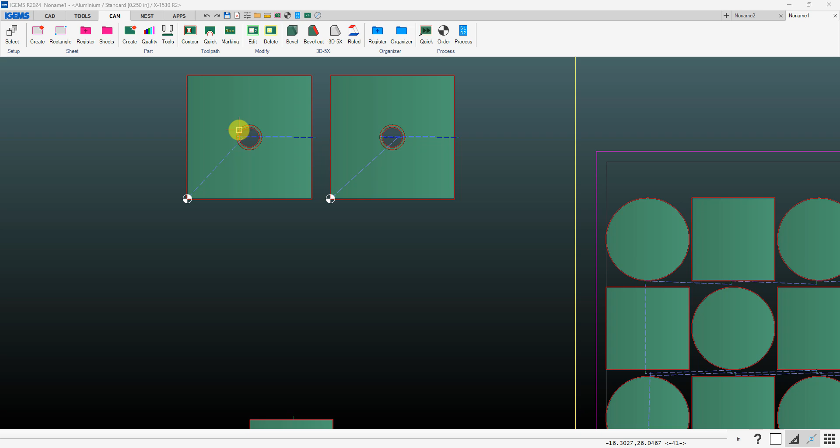When you post out a file for Apex 60 using the height setter, you might get a warning about potential height setter collisions. And what we're looking for is areas where the height setter might come down within a specified radius around a prior pierce point.

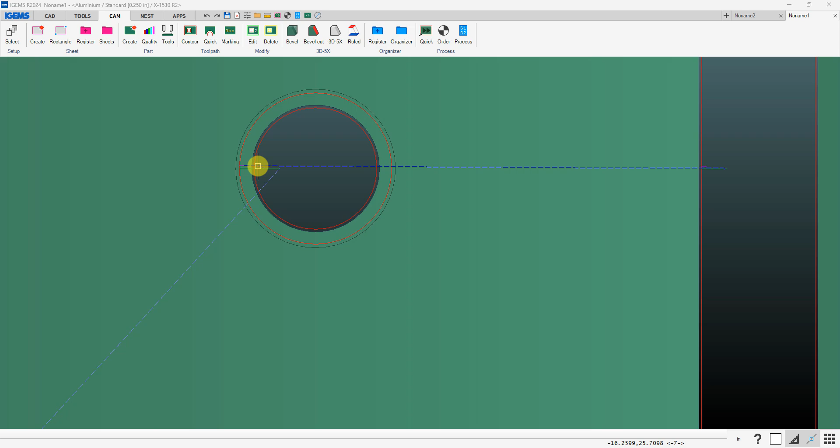If we're doing a countersink like this, normally we're going to height set and do the vertical cut first, and then come back just using programmable Z for the bevel cut. However, if you change things around, or like I've done, apply a height set attribute on the bevel cut to force it to do a height set, then you can get it into a situation where the height setter would want to come down on an area where there's not going to be any material, because the slug will probably have dropped into the tank.

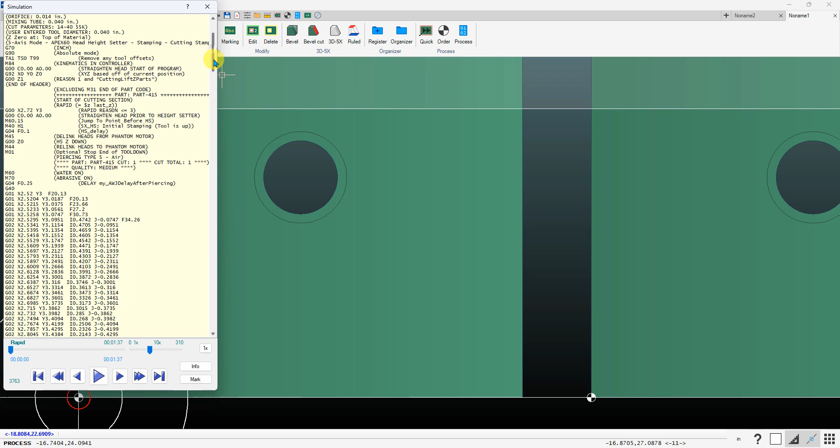So we want to, of course, avoid that, and that's what this warning message is that you can potentially get. So here it warns us potential height setter crash, and of course it's going to cut that vertical cut first, and then because I applied a height set attribute on the second cut, it comes back, wants to do a height set there, and because that height set is within a ½ inch radius of a prior pierce point, then it gives us that warning about the potential height setter crash.

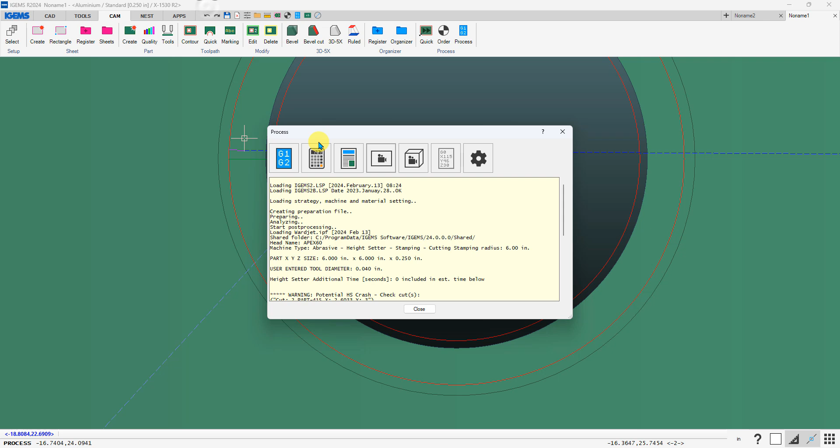So normally good practice, if you are doing something like this, to do your lead-ins for the vertical cuts very close to where you'll be doing the lead-in for the countersink, and then normally it'll do the height set on the first vertical cut, and then use programmable Z for the bevel cut.

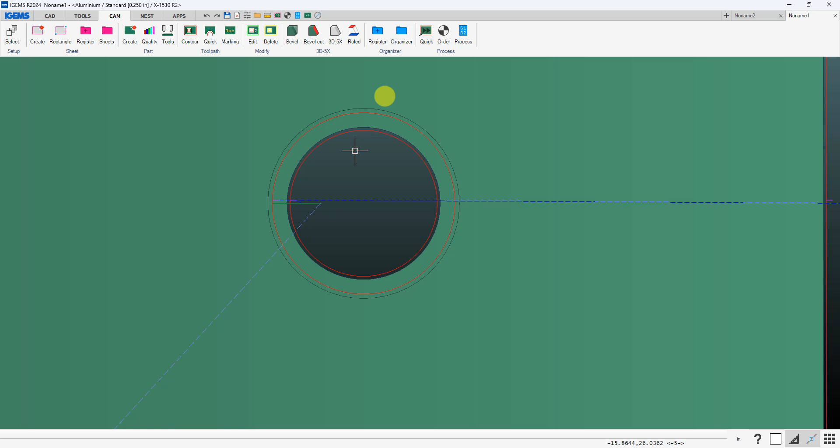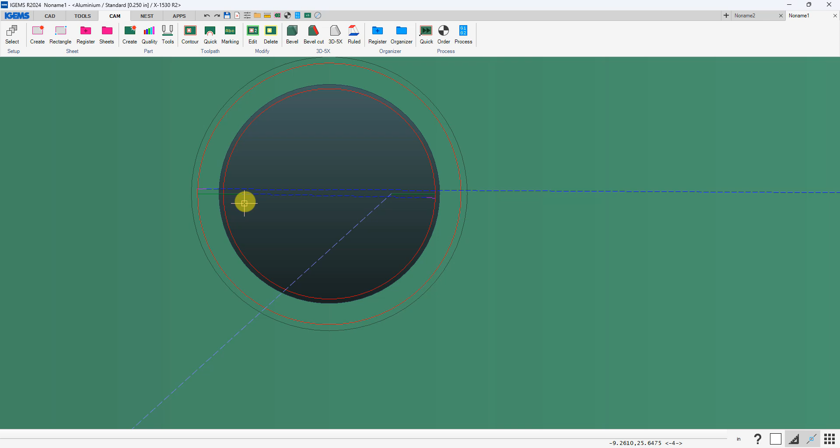If you do a technique like this, which wouldn't be recommended, you've got your lead-in for the vertical cut over here, and then you've got a fairly long distance over to where it's going to do the bevel cut, so there's the potential that the height setter might want to then be triggered, and then you're not going to have any material there, so beware of that. This is an area where this could fail. So here we get no warning about any issues because the height setter is beyond that ½ inch radius from that prior pierce point.

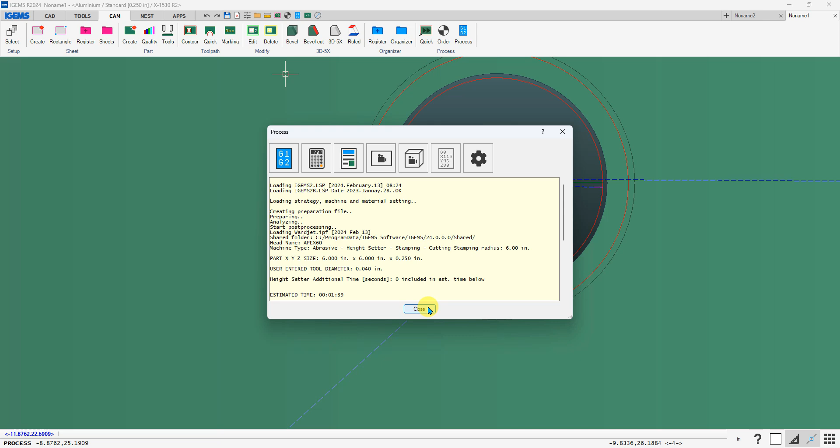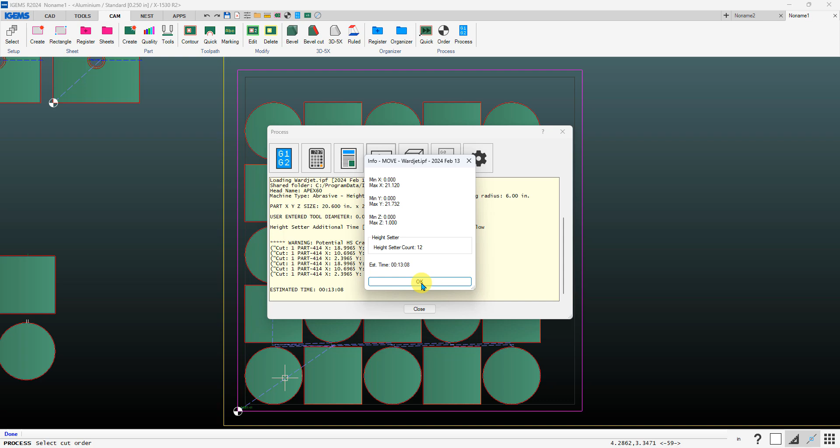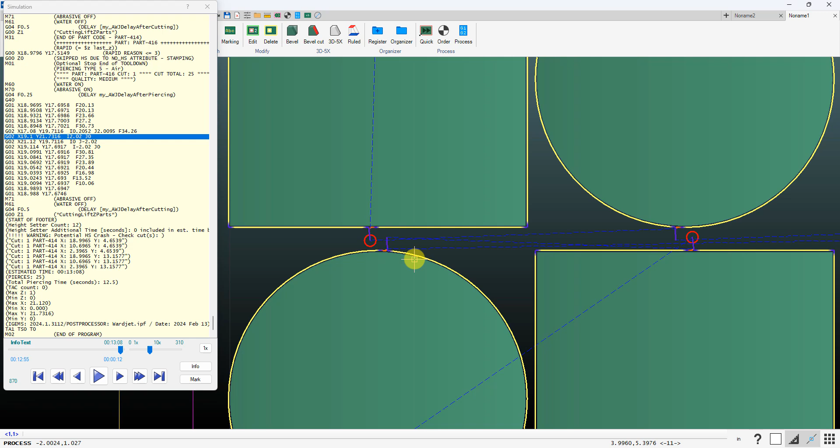Now if you have a nest like this, if we go ahead and process this one, so I got my cutting stamping radius set to 6 inches, and I've got this warning of half a dozen potential height setter crashes. And we can scroll down towards the end, click on basically last cut, and you can see we've got a pierce point here and then a height set here. So that's one of the potential areas. Now you can look at that and be like, okay, that's not going to be an issue. So you can not be too concerned about that.

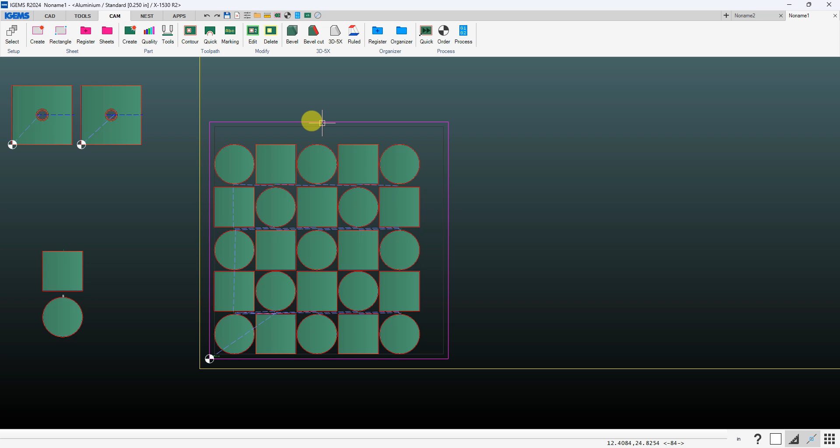But one thing you can do is there's an app that I've written that allows you to basically overlay those potential height setter crash points, so you can look through very easily and see if there's any issues. So this is an app that may already be in your shared folder. If you go to apps and click on load app and then click on this add button, it'll bring you into the app folder on your shared folder, and there should be a file in there called HS crash indicator.

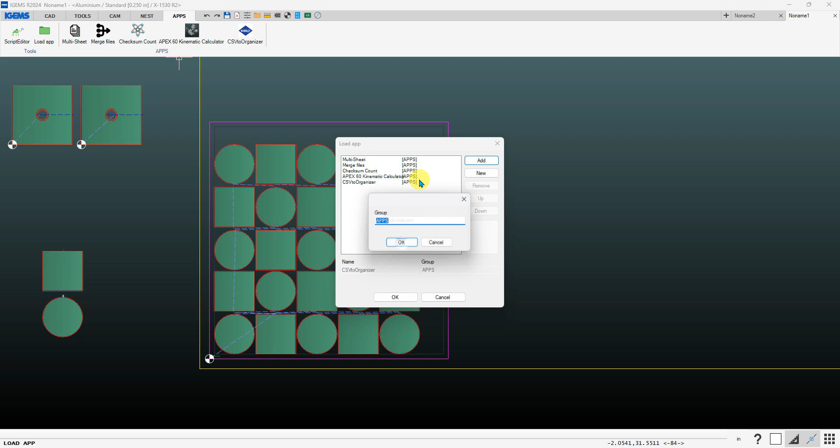If it's not there, then you can go to our Ikulu wiki page, so ikulu.wardjet.com, and then in your search bar over here, top right hand corner, just start typing in IGEMS, just letter I, click on IGEMS. That'll bring you to this page. You can scroll down to here, got the height setter crash indicator, click on that, and you can download this Lisp file that'll go into that apps folder. And then if you want, you can also download this little PNG for icon onto the toolbar. So let's go ahead and add that app, and let's add that image.

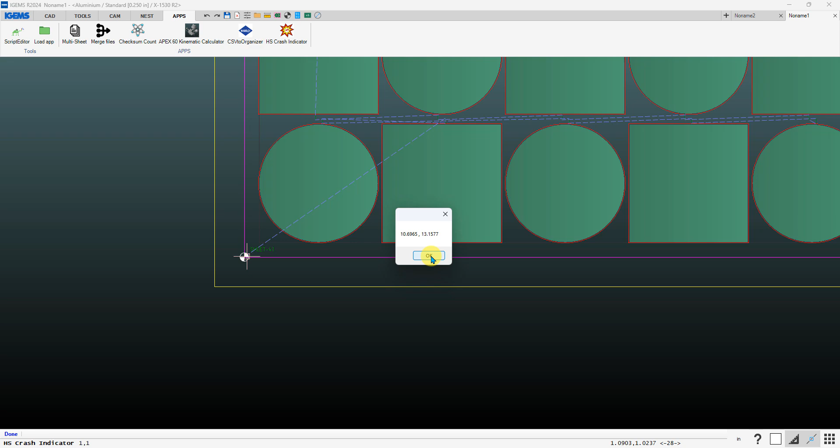Okay. So if you run this app, it'll basically first ask your origin point, so where you got your 0,0 point on your sheet, so you can left click there, and then it'll just show the XY coordinates of where those height setter warnings were from that file, and it'll draw circles where those locations are.

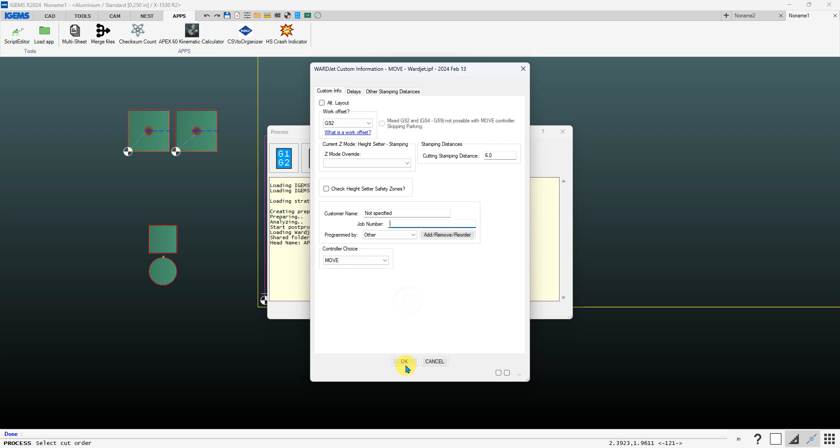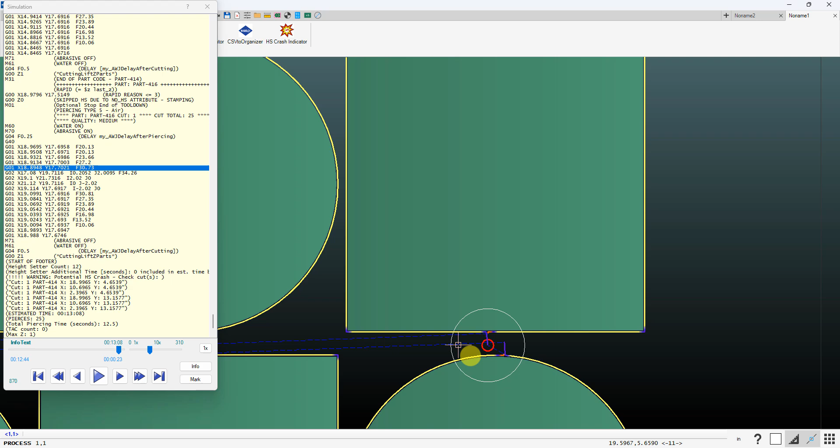And then it may be easier at this point now if you go back in and do the 2D simulation to then overlay this. And again, if we scroll towards the end here, so then you can look and see, all right, so there's one. So yeah, we've got a pierce here, height set there, but not an issue. And then you can very easily go through and see if there's any real issues to be concerned about, which there wouldn't be in this scenario.

And finally, if you want to change that radius that it looks around for those potential height setter crashes, that is on this other stamping distances tab. And you've got this field here. So if you set to 0, then it would only warn you if there was a height setter that was directly on top of a prior pierce point. Or if you set it to a big number, you'll get lots of warnings because it'll be looking at a much larger radius.